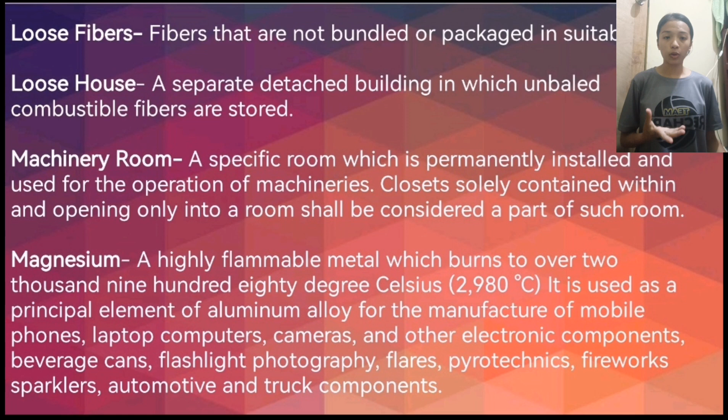Next is loose house, a separate detached building in which unbaled combustible fibers are stored. Third is machinery room, a specific room which is permanently installed and used for the operation of machineries. Closets solely contained within and opening only into a room shall be considered part of such room. Machinery rooms are designed to provide safe and controlled environments for the operation and maintenance of the system.

Next is magnesium. Magnesium is a highly flammable metal which burns at over 2,980 degrees Celsius. It is used as a principal element of aluminum alloy for the manufacture of mobile phones, laptops, computers, cameras, and other electronic components, beverage cans, flashlights, photography flares, pyrotechnics, fireworks, sparklers, automotive and truck components. It is also used in various industrial applications such as the production of aluminum alloys and the manufacture of electronic devices.

Next is material safety data sheet, a form that contains data and information regarding the properties of particular substances, and maximum allowable working pressure, or MAWP, which is the maximum pressure permissible at the top of a container in its operating position for a designated temperature as established by the container manufacturer.

Next is means of egress. It's a continuous and unobstructed route of exit from one point in a building, structure, or facility to a public way. In building and fire safety, means of egress refers to the path or route that people use to exit a building in case of an emergency such as fire.

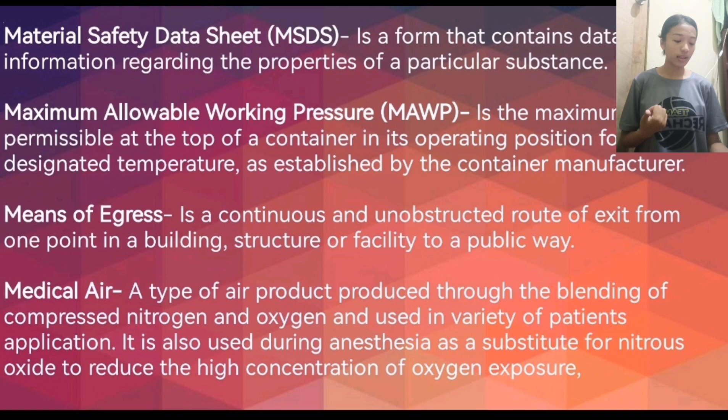Next is medical gas, a type of gas used in medical and similar facilities, including medical air and mixtures of nitrogen, carbon, helium, and other gases. Medical gas refers to gases that are used for medical purposes, such as diagnosis, treatment, or life support. Proper handling, storage, and administration of medical gases are essential to ensure patient safety and the effectiveness of medical treatment.

Next is nesting, a method of securing flat-bottom compressed gas containers upright in a tight mass using a contiguous contact system whereby all containers within a group have a minimum of 3 points of contact with other containers, walls, or bracing.

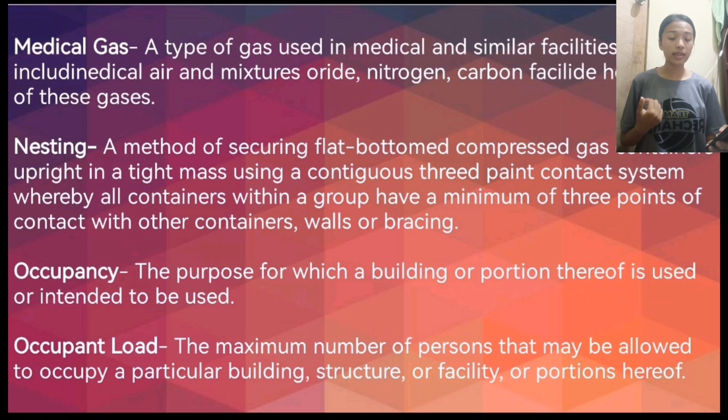Next is occupancy, the purpose for which a building or portion thereof is used or intended to be used. The occupant load is the maximum number of persons that may be allowed to occupy a particular building, structure, or facility, or portion thereof.

Next is occupant, any person actually occupying and using a building or portion thereof by virtue of lease, contract with the owner or administrator, or by permission or sufferance of the latter.

Next is oil burning equipment, an oil burner of any type together with its tank, piping, wiring, controls, blower, and related devices, and shall include all oil-fired units, heating and cooking appliances.

Next is organic coating, a liquid mixture of binders such as alkyd, nitrocellulose, acrylic or oil, and flammable and combustible solvents such as hydrocarbon, ester, ketone, or alcohol, which when spread on a surface becomes a durable, protective, and decorative finish. Organic coatings are protective layers applied to surfaces to enhance their durability, appearance, and resistance to corrosion or other environmental factors. These coatings are composed of organic compounds such as resins, binders, solvents, and additives.

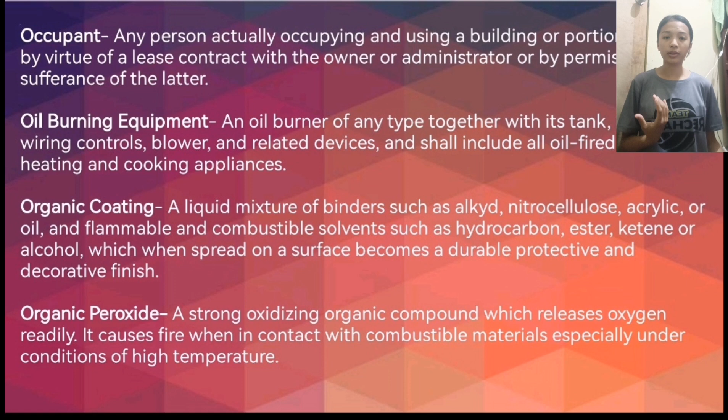Next is overloading, the use of one or more electrical appliances or devices which draw or consume electrical current beyond the design capacity of the existing electrical system.

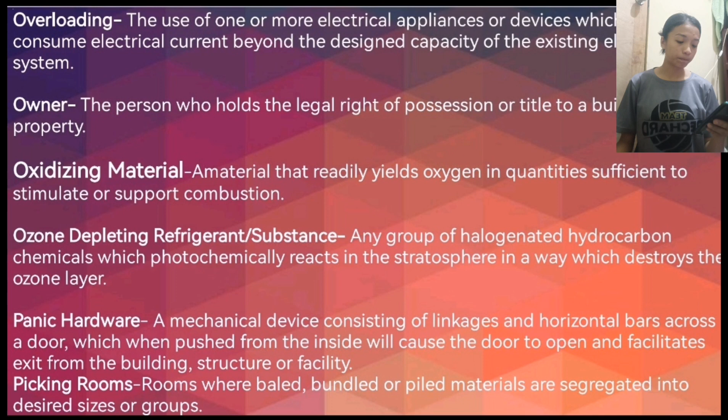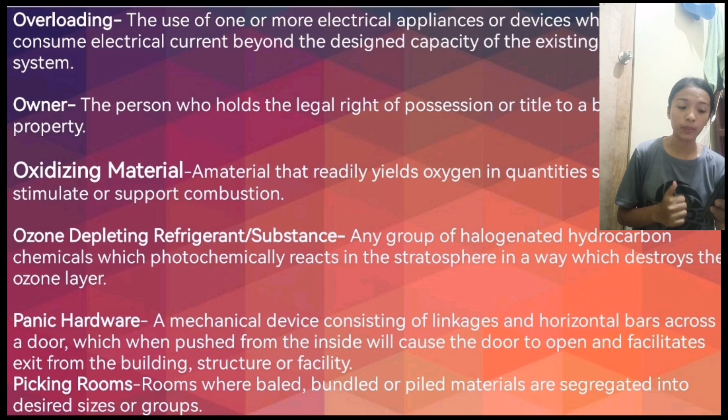So next is picking rooms. Rooms where baled, bundled, or piled materials are segregated into desired sizes or groups.

Plastic. Group A plastic materials having heat of combustion much higher than that of ordinary combustibles and burning rate higher than that of Group B plastic. Group B plastic materials having heat of combustion and burning rate higher than that of ordinary combustibles, but not as high as those of Group A plastics. Group C plastic materials having heat of combustion and burning rate similar to those of ordinary combustibles.

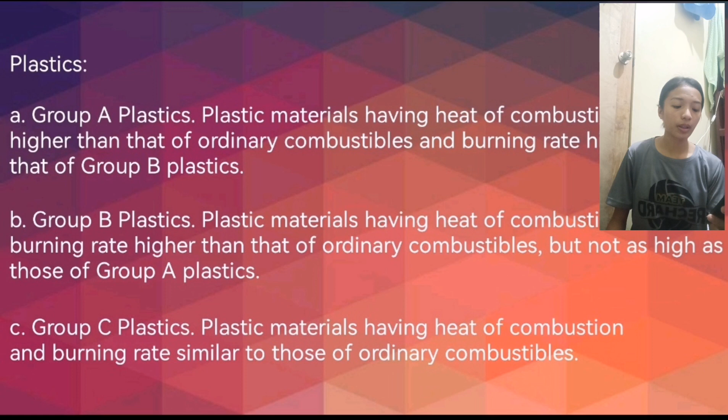Next is plenum, an air compartment or chamber to which one or more ducts are connected and which forms part of an air distribution system.

So portable tank. Any closed vessel having a liquid capacity over 227 liters and not intended for fixed installation.

And next is fire safety practitioner. Any qualified person recognized by the BFP engaged in, but not limited to, the design, construction, installation, repair and maintenance, assessment, and rehabilitation of fire safety construction, suppression and control systems, protective and warning systems, and life safety related services, or employed as a safety officer of public and private establishment companies.

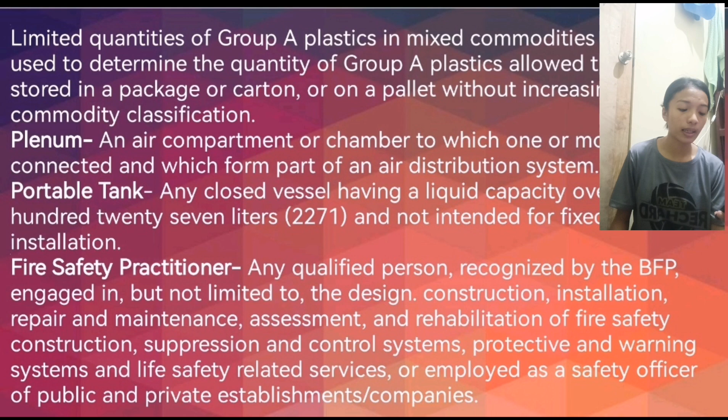Pressurized or forced draft burning equipment. Any type of burner where the fuel is subjected to pressure prior to discharge into the combustion chamber and or which includes fans or other provisions for the introduction of air at above normal atmospheric pressure into the same combustion chamber.

So next is proscenium wall, a fire-resistive wall which separates a stage or enclosed platform from the public or spectators area of an auditorium or theater.

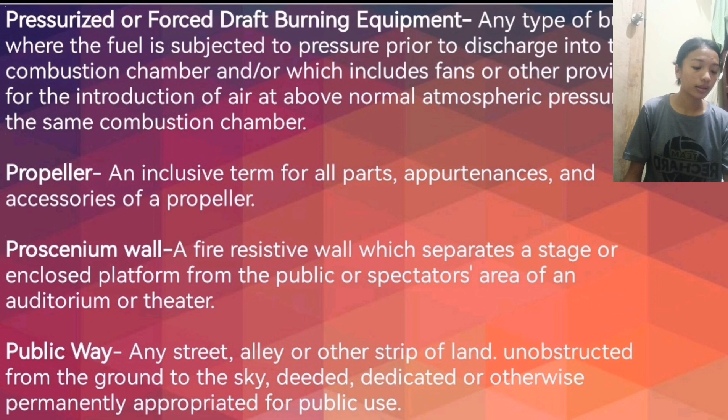And then next is public way. Any street, alley, or other strip of land unobstructed from the ground to the sky dedicated or otherwise permanently appropriated for public use. So when we say public way, alagyan yun na siya public, unlike sa private nga ang private is katong mga authorized person lang nga pwede ana nga mo kuan.

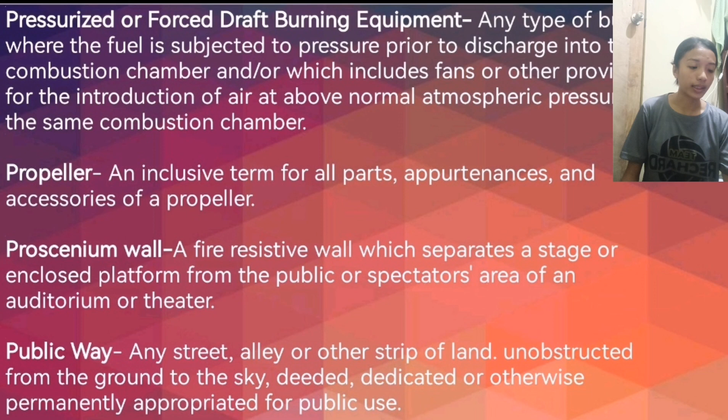And then next is pyrophoric, descriptive of any substance that ignites spontaneously when exposed to air. So when we say pyrophoric, refers to a substance that spontaneously ignites. Mao ni siya ang pyrophoric.

Then next is recapping, a process of restoring used tires to a usable condition by bonding new rubber onto the worn tread and lateral surface.

And refining, a process where impurities and or deleterious materials are removed from a mixture in order to produce a pure element or compound. It shall also refer to partial distillation and electrolysis.

Next is refrigerating system, a system of four major components, namely the compressor, condenser, expansion valve, and the evaporator, through which a very low boiling point substance, a refrigerant, flows in a cycle and absorbs heat from the immediate surroundings, thereby producing the cooling effect, also known as the refrigerating effect.

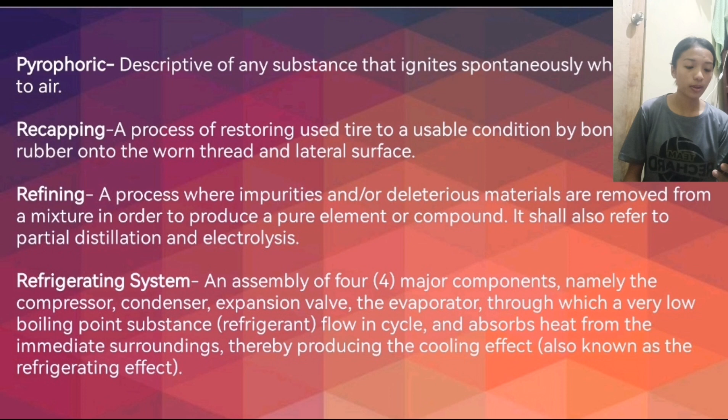Next is roll coating, a process of coating, spreading, and impregnating fabric, paper, or other materials as they are passed directly through a tank or trough containing flammable or combustible liquids, or over the surface of a roller revolving partially submerged in a flammable or combustible liquid.

So next is safety can, an approved container of not more than 18 and 9/10 liter capacity, having a spring closing lid and spout cover, and so designed that it will safely relieve internal pressure when subjected to fire exposure.

So next is safety factor. It is the ratio of the design burst pressure to the maximum working pressure and shall not be less than 4. Salvage yards or shops, an inclusive term that refers to wrecking yards, junk yards, or waste material handling plants and shops, which can be used interchangeably.

Next is self-closing doors, automatic closing doors designed to confine smoke and heat and delay the spread of fire. So self-closing doors, kato na yung mga doors nga direct, if makasmell siya ug aso, mo direct na siya close, mo ayran na siya close, mo naa siyang self-closing doors.

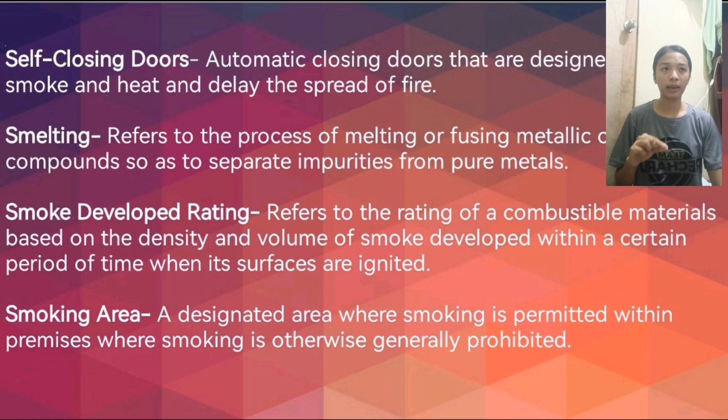Next is smoking area, a designated area where smoking is permitted within premises where smoking is otherwise generally prohibited. So ang smoking area mao na siya ang area nga ang smoking, ang pagpanigarilyo is permit na siya didto ka manigarilyo, and kana nga area is safe na siya sa mga tao nga ganahan manigarilyo, mao na siya nga place nga safe na siya nga walay materials nga pwede ma-kuan sa smoke, for example manglabay-labay sa kuan sa smoke, mao na siya.

Next is source of ignition, a source of energy sufficient to ignite a flammable atmosphere, and include open flames, smoking, incandescent material, electrical welding arcs, and electrical or mechanical equipment not suitable for use in particular hazard zone.

Next is spray booth, a mechanically ventilated appliance of varying dimensions and construction provided to enclose or accommodate a spraying operation and to confine and limit the escape of spray vapor and residue and to exhaust it safely. So when we say spray booth, ang mao siya ang mechanical appliance of varying dimension and kakonstruct ni siya to provide enclose or ga-accommodate sa spraying operation.

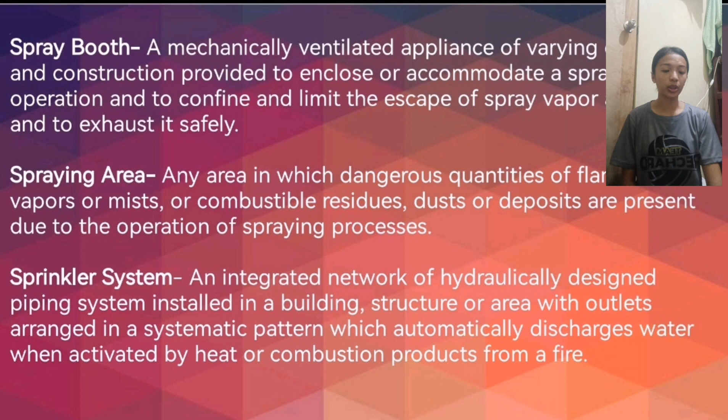Sprinkler system, an integrated network of hydraulically designed piping system installed in a building, structure or area with outlets arranged in a systematic pattern which automatically discharge water when activated by heat or combustion products from a fire. So ang systematic pattern ani is kung automatic ma-discharge siya when ma-activated by heat or combustion products from a fire, automatically ma-discharge siya.

Stage, a partially enclosed portion of an assembly building which is designed or used for the presentation of plays, demonstration, or other entertainment activities wherein scenery, drops, or other effects may be installed or used, and wherein distance between the top of the proscenium opening and the ceiling above the stage is more than 152 centimeters. So when we say stage, mao ni siya ang building nga ga-design para sa, for example, mga presentation of plays, mga mag-demonstrate, mao na siya ginagamit. And demonstrate or other activities nga mag-need sila og stage, nga need nila ang stage para sa mga presentation.

Next is standpipe system, a system of vertical pipes in a building to which fire hoses can be attached on each floor, including a system by which water is made available to water outlets. So when we say standpipe system, kato ni siya mga naa sa makita sa mga sa BFP, kato hose na siya, taas na siya nga if naay fire mao na siya ginagamit para dito maagi ang tubig, mao siya ang ginagamit to spray sa mga sunog, ana mao ginagamit nga hose, kaning standpipe system kani mao na siya ang fire hoses nga makita nato sa gamit sa mga BFP, ginagamit nila sa mga BFP.

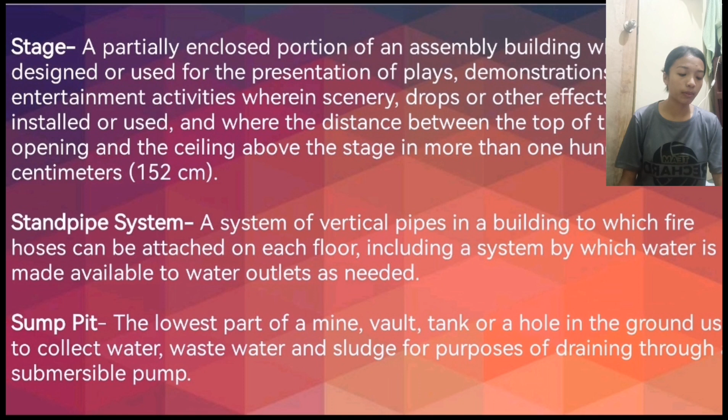The next is tank truck, any single self-propelled motor vehicle equipped with a cargo tank mounted thereon and used for the transportation of flammable and combustible liquids. So tank truck, example ani kanang gasolina, kanang truck nga ginagamit nga sulod nila is gasoline, mao na example ana para mohatud dito sa gasoline station.

And tank vehicle, any vehicle carrying or towing a cargo tank used for transporting flammable fluids or hazardous chemicals. Ang tank vehicle mao na siya ang ginagamit para mag-transfer siya og mga flammable fluids or hazardous chemicals. So next is tank full trailer, any vehicle with or without auxiliary motive power equipped with a cargo tank mounted thereon or built as an integral part thereof, used for the transportation of flammable and combustible liquids, and so constructed that practically all of its weight and load rest on its own wheels.

Next is tank semi-trailer: any vehicle with or without auxiliary motive power equipped with a cargo tank mounted thereon or built as an integral part thereof, used for the transportation of flammable and combustible liquids, and so constructed that when drawn by a tractor by means of a fifth wheel connection, some part of its load and weight rests upon the towing vehicle.

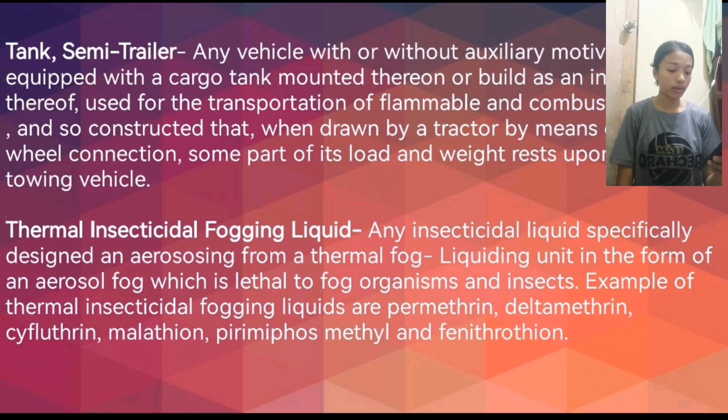Next is thermal insecticidal fogging: the utilization of any insecticidal liquid passed through thermal fog generating units, whereby means of heat, pressure, and turbulence, such liquids are transformed and discharged in the form of fog or mist blown into the area to be treated.

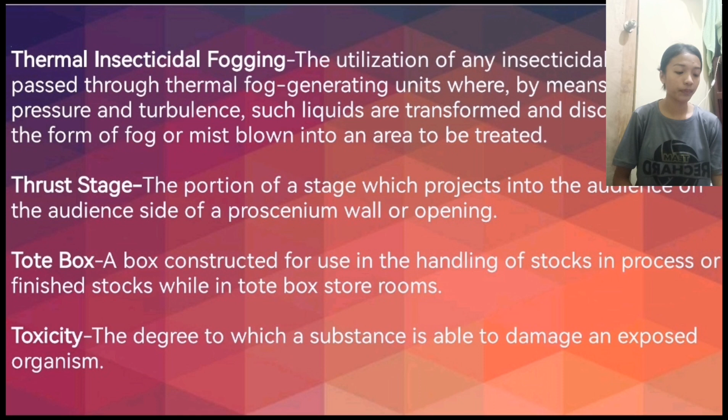Used water: liquid waste generated by treatment plants, housekeeping, operation and maintenance, and laboratory activities, including but not limited to washing, flushing, and cleaning activities. It also includes cleaning, flushing, and draining water that bears dirt and sludge from sedimentation basins, settling tanks, and other treatment process and unit operation facilities, and backwash water generated in the backwashing, cleaning, and flushing of the filter media or bed.

So used water is very important. It's used by humans, by plants, in food processing, and in those operations, maintenance, and laboratory activities. Water is very, very important to us.

Next is ventilation: the process of supplying or removing air by natural or mechanical means to or from any space, such that the air may or may not have been conditioned.

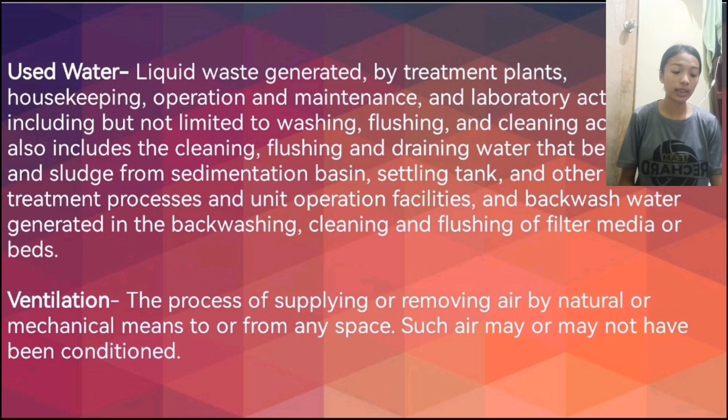Vertical shaft: an enclosed vertical space or passage that extends from floor to floor, as well as from the base to the top of the building.

Vestibule: a passage, hall, or antechamber between the outer doors and the interior parts of the house or building.

Ventilation refers to the copious flushing of an area with fresh air for the mitigation of explosion and other fire hazards.

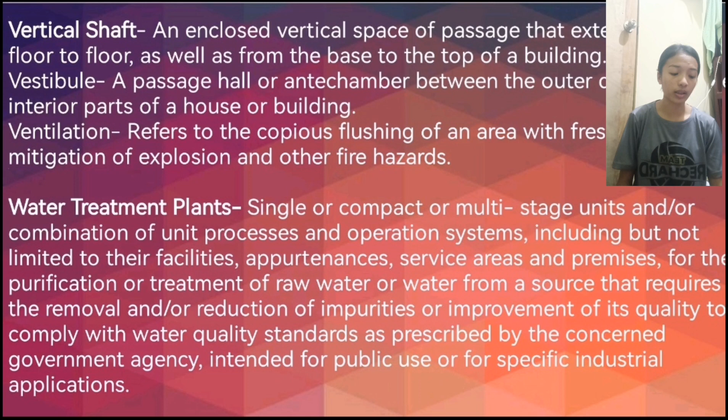Water treatment plants: single or compact or multi-stage units and combination of unit process and operation systems, including but not limited to their facilities, appurtenances, service areas, and premises for the purification or treatment of raw water, or water from a source that requires removal and reduction of impurities or improvement of its quality to comply with water quality standards prescribed by the concerned government agency, intended for public use or specific industrial applications.

Wastewater: liquid waste generated by human activity that uses water, or water that comes from residential, commercial, institutional, recreational, industrial, agricultural, and other facilities, similar occupancies, and related activities.

So, in my opinion and in my own understanding, wastewater is used in agriculture and in other facilities that make use of it.

Wastewater treatment plants: single or compact or multi-stage units and combination of unit process operations, including but not limited to their system, facilities, appurtenances, service areas, and premises for the treatment of used water or wastewater generated by residential, recreational, institutional, commercial, and industrial and other similar premises and related activities that require the removal and reduction of contaminants.

These similar and related activities require the removal and reduction of contaminants and pollutants, or improvement of its quality, to comply with the effluent water quality standard of the receiving body of water or environment as prescribed by the concerned authority.

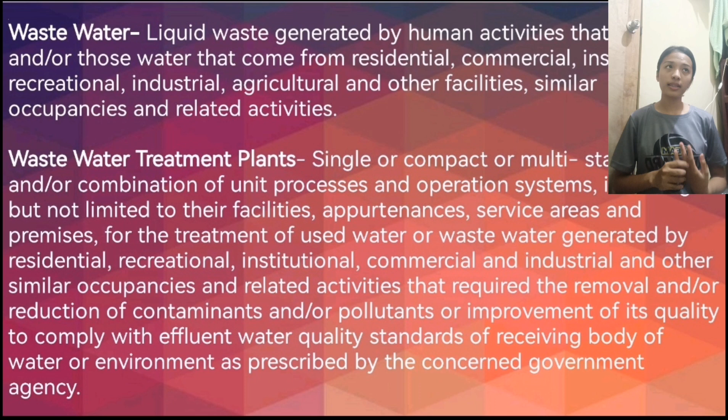So in my own opinion, wastewater treatment plants treat water for plants that need it, especially now during El Niño, when the weather is very hot and many plants are dying or being damaged because of the heat. So wastewater treatment plants are very important for those plants that need water.